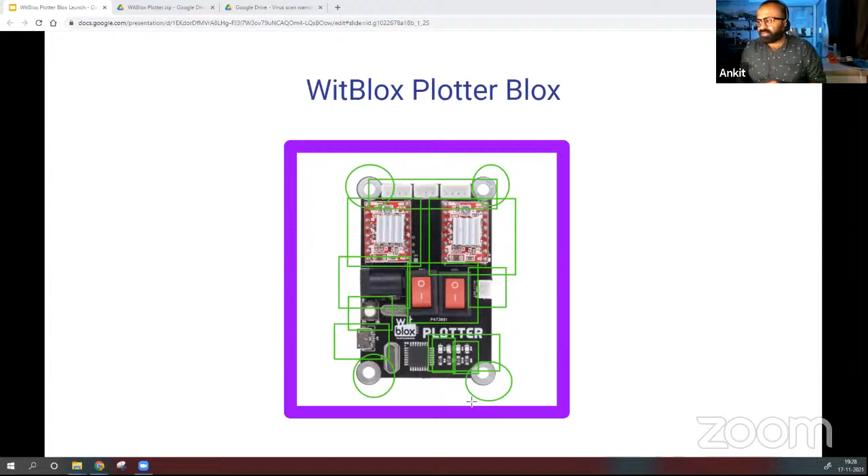What is the price of it? I'll come back to that—we have the price disclosed at the end of the entire explanation, so don't worry. And regarding how we have to buy it, there are sets like the solar box, the DIY mega kit—I'll let you know about that too. We'll come back to that.

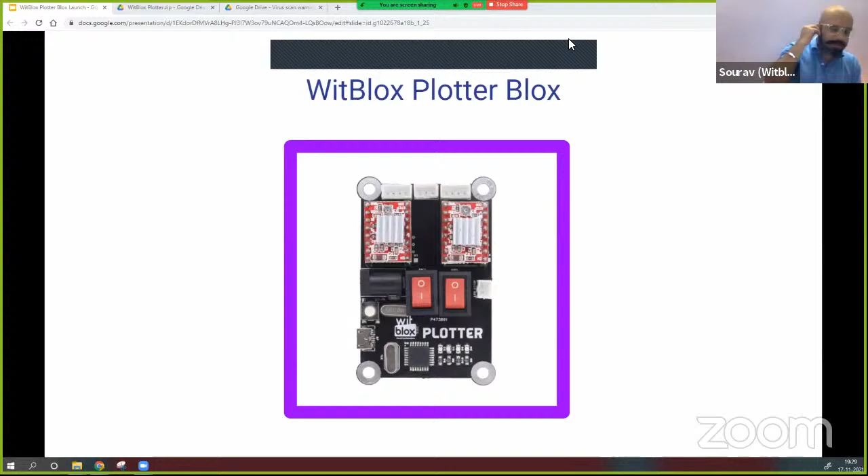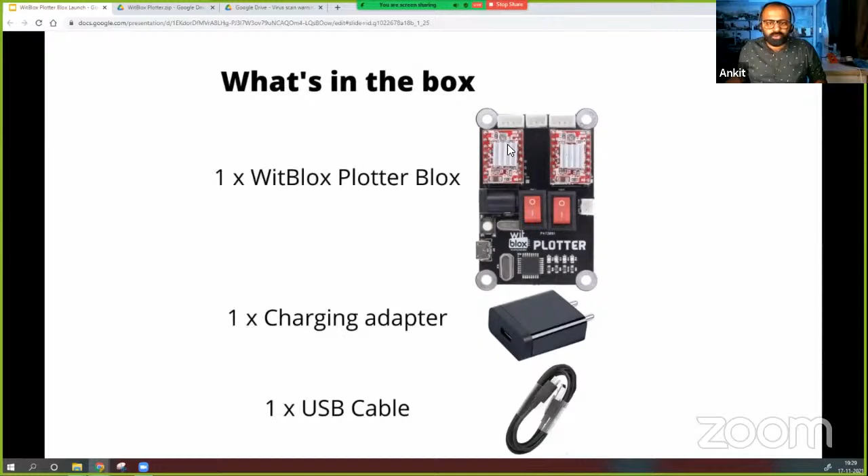How it works is simple. When you have a design, you just click a photo, put it in your PC, and use the software that we are going to provide. Using that software, you'll import the image and then hit play. When you hit play, the Plotter Blox will automatically take that drawing's outline, and that outline will be printed by the Plotter Blox.

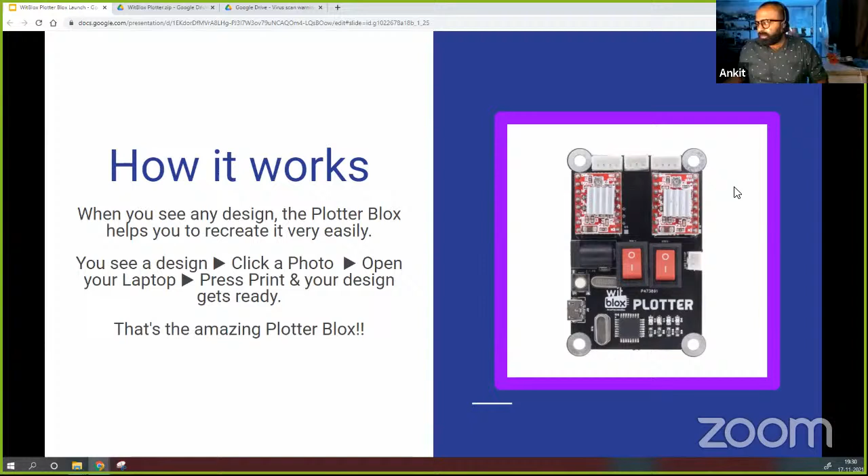Sir, that WitBlox app—will this project show how to do printing with Plotter Blox? Will that come, sir?

Yes, all the how-to part I'm going to show you right now, and we'll upload videos for configuration as well, because there are two parts to this Plotter Blox: one is the hardware arrangement, and second is the software configuration. Initially at the software level you'll have to do some settings, which we have already tried. That software is open source, but we are giving you a package of it so that in one click you can initialize everything required—you won't have to search for different software at different places. Everything will be in a single folder.

You'll install the software, and I will show you how to do the settings. After doing that, just input the image you want to plot, and the plotting process will start if you've done the hardware correctly. So we'll show you the hardware too.

So let's take a look at the video first.

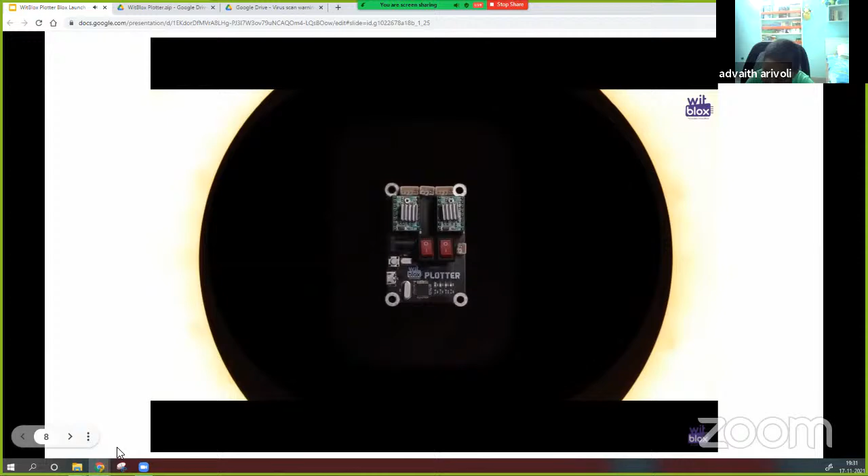Finally, we are ready. It took 2.5 years of research and development for us to come up with our very own Plotter Blox. I know you all were waiting for this moment eagerly, and now the team of WitBlox is so happy to present you the Plotter Blox.

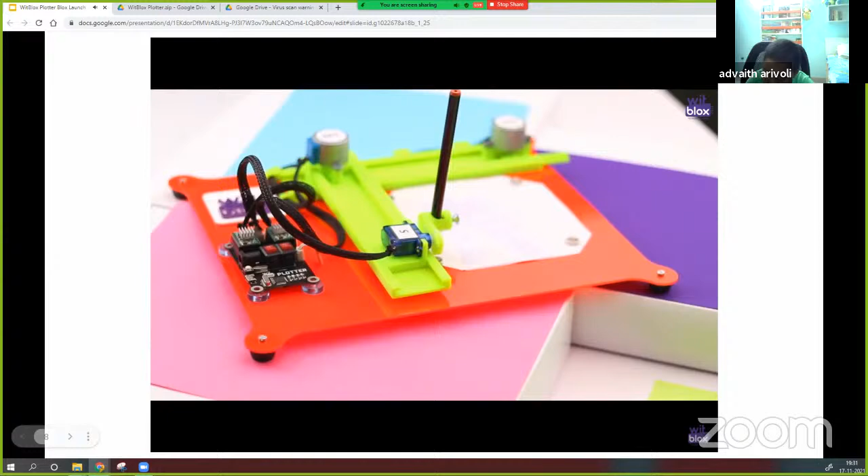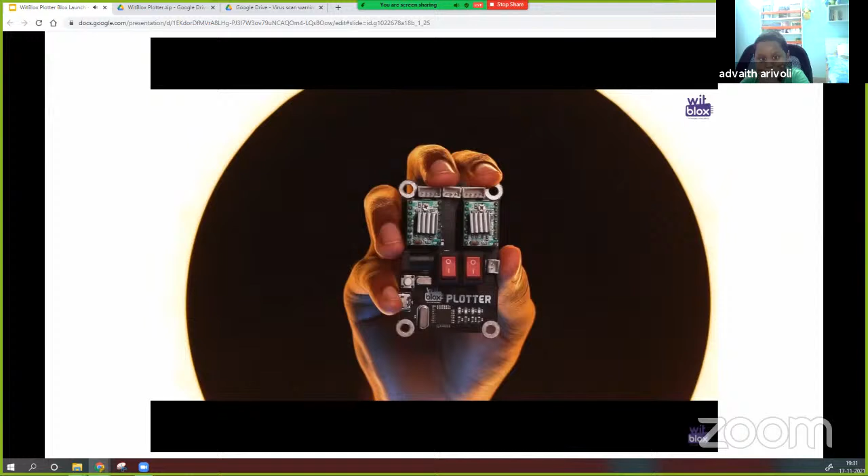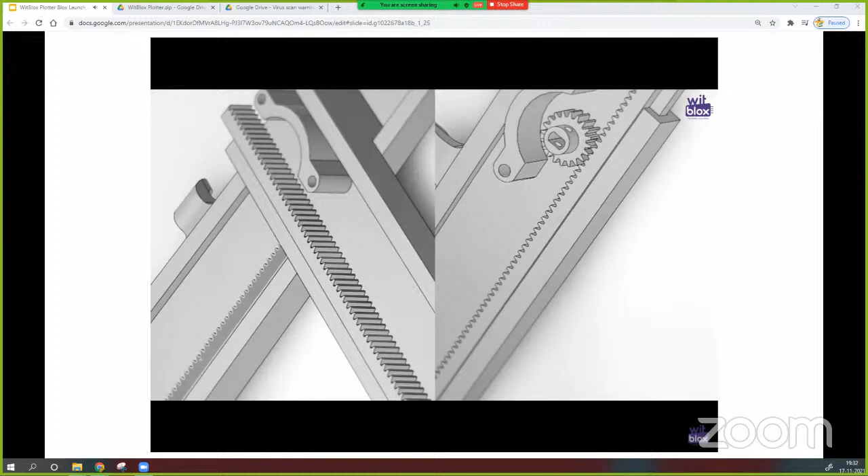Why did it take 2.5 years? Well, it's an obvious question. Let me use this opportunity to reflect back on how it all started. It started with an idea. We came up with a lot of prototypes, and we designed 7 to 8 types of Plotter Blox. It was a great learning opportunity. A lot of changes took place every few weeks, and every now and then a new difficulty popped up. This was happening because we were designing the product from scratch, but it was a great learning journey.

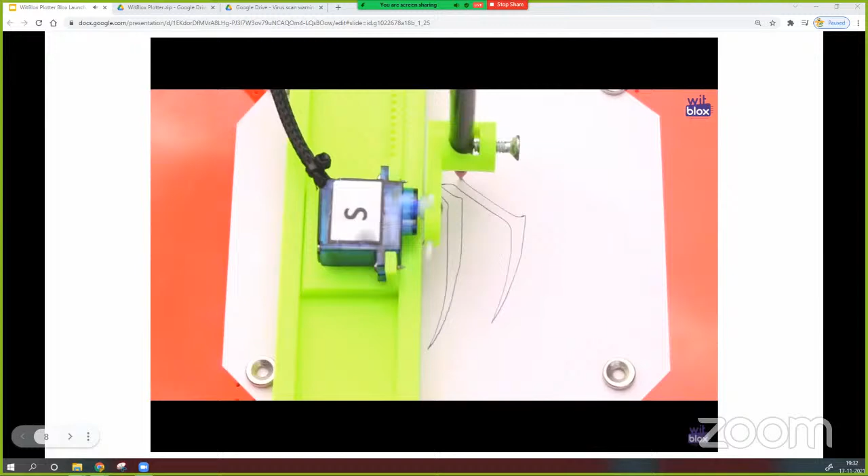So now, when you see a design, the Plotter Blox will help you recreate it very easily. You see a design, click a photo, open your laptop, and press print. That's the amazing Plotter Blox. Over to you guys.

So sir, we can control any motor, any servo, with the plotter block, right sir?

Okay, I'll let you know first how the software is, and then we'll come back to the hardware. Just hold on. Yes sir, I have a doubt. You hold on with your doubt, dear. We'll come to that part at the end of this event, we'll clear all your doubts. Don't worry. Yeah sir, okay sir, I have the doubt at hardware. Okay, just hold on, we'll come back. And I can see Tech Warrior has just taken a screenshot of my background. Nice to see that, Tech.

So let us come back to the software. What is this particular software? When you buy Plotter Blox, we are going to send you a QR code. All you need to do is use that QR code and scan it on your phone, or scan it from your laptop's webcam, or use the link at the bottom. It will send you to a drive link. I'll show you that drive link. Something like this would appear - it will give you the Witblox plotter.zip file. Is my screen visible to everyone? Yes sir, okay. So plotter.zip is the content that is going to come here.

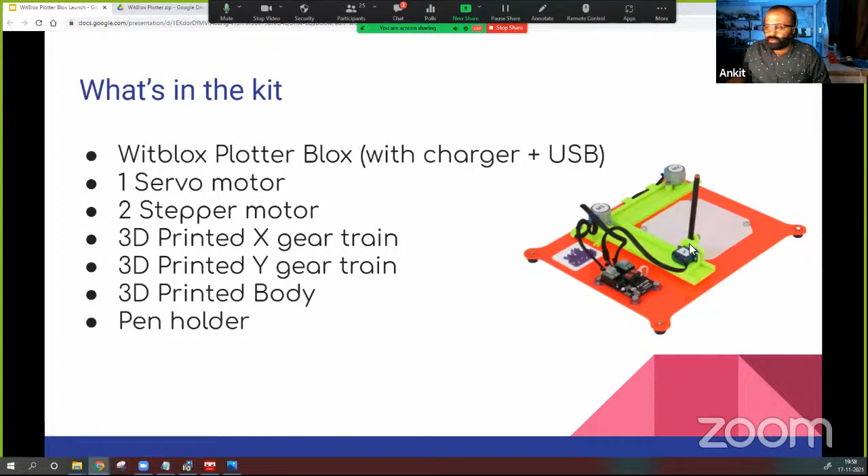Okay, actually, I'm really sorry, this is not a 3D printed body. That's a mistake over here. It's an acrylic body over here, with a pen holder. So this is what we are going to have in the kit.

Sir, what will be the price of the full kit with all the blocks? Let me just show you that. Sir, can I ask a question? Just a second, let me just show you some applications of what it can do.

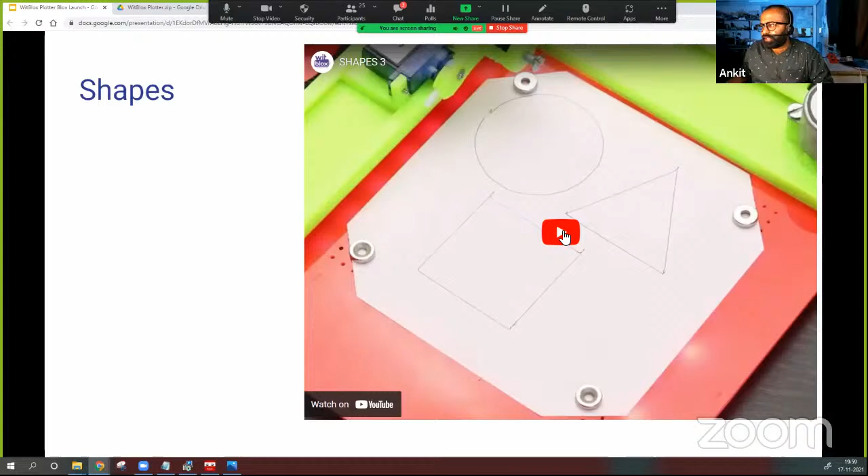Everyone is ready to complete their homework with the new Plotter Blox. But as we know, the Plotter Blox has endless possibilities, and one of them is drawing itself. So let's give our plotter some interesting shapes to draw. Let's begin.

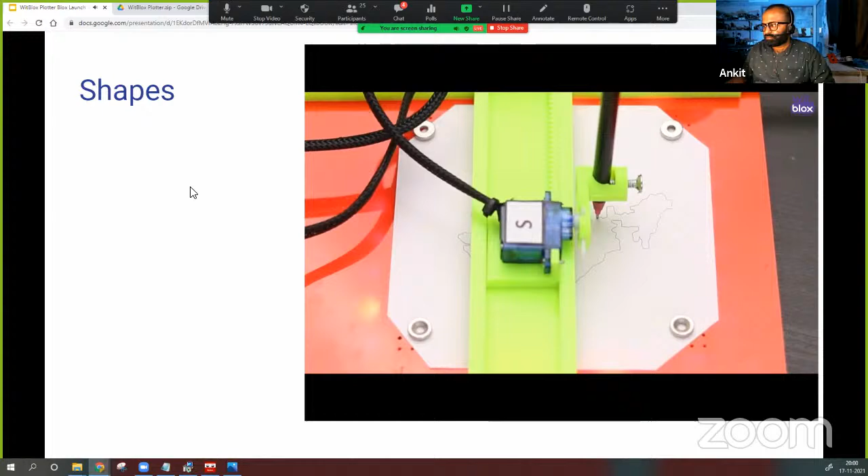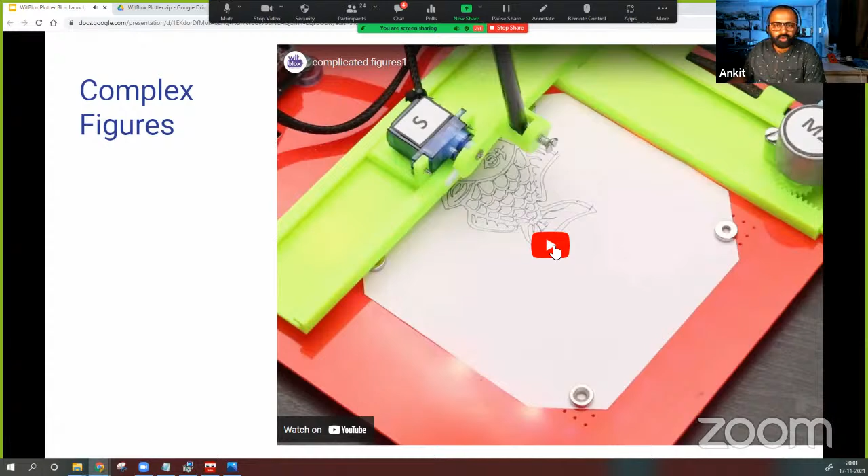Everyone is ready to complete. Let us look at some complex figures also. After making some simple shapes, I cannot stop at basic designs. Now let's give the plotter some difficult and complicated designs to draw. Let's begin.

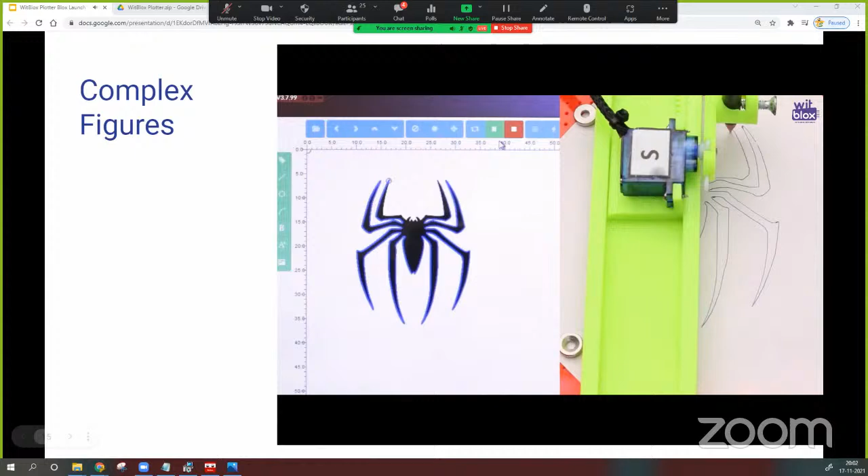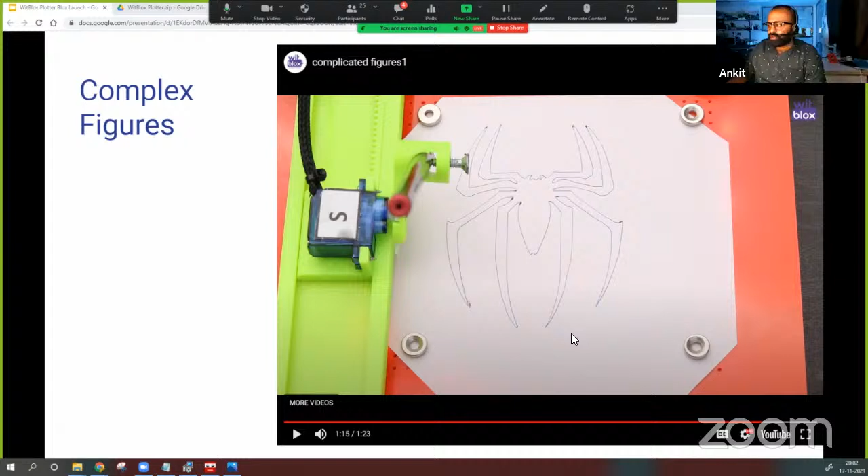Now you see the spider that we used as an image, if you look at the image, it was a filled image. But since we did the settings as an outline, it will always pick up the outline part, and it is going to draw the outline.

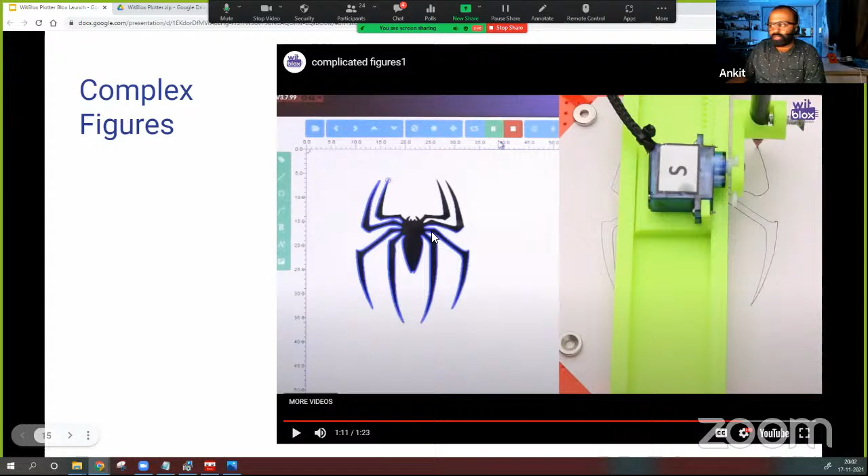Excited, right? After making some simple shapes, I cannot stop at basic. Let us look at some words also. After drawing some basic shapes and lines, we are very close to sketching out some text using our Plotter Blox. So now let's try out how the Plotter Blox writes.

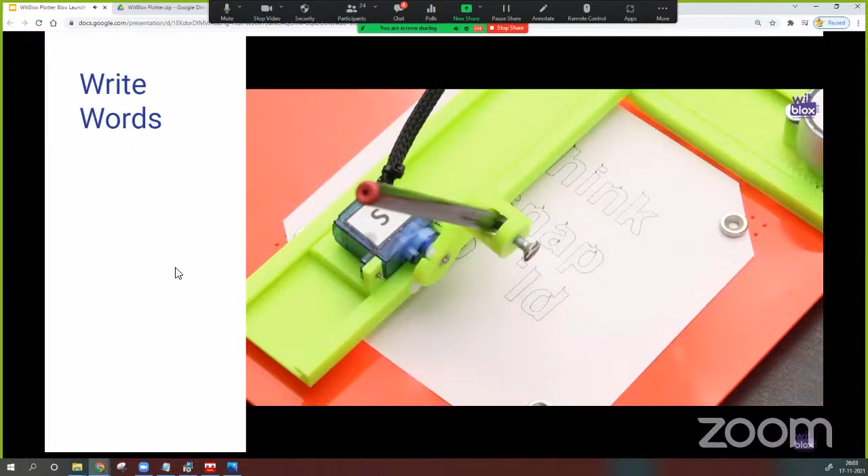Okay, now let's try some design that has both some shapes along with some text. Any idea where we can find such design? Yes, we can make our Witblox logo using the Plotter Blox. Let's start.

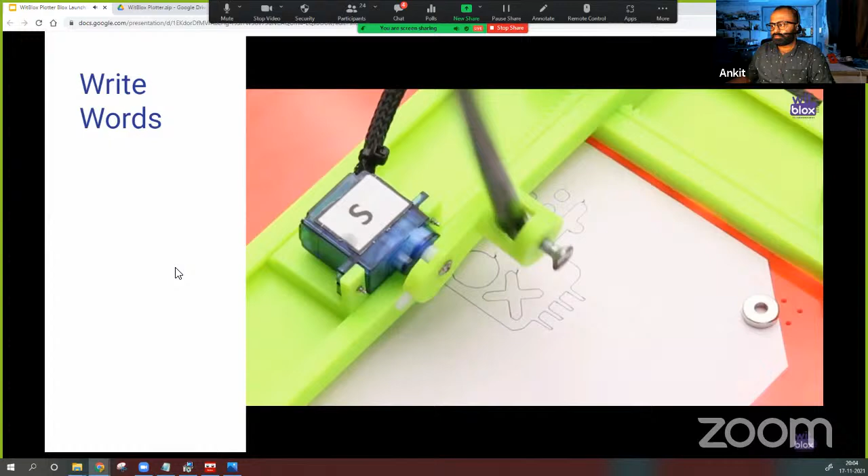So here are some of the applications that we did. Let's move on. After drawing some, so how to get them?

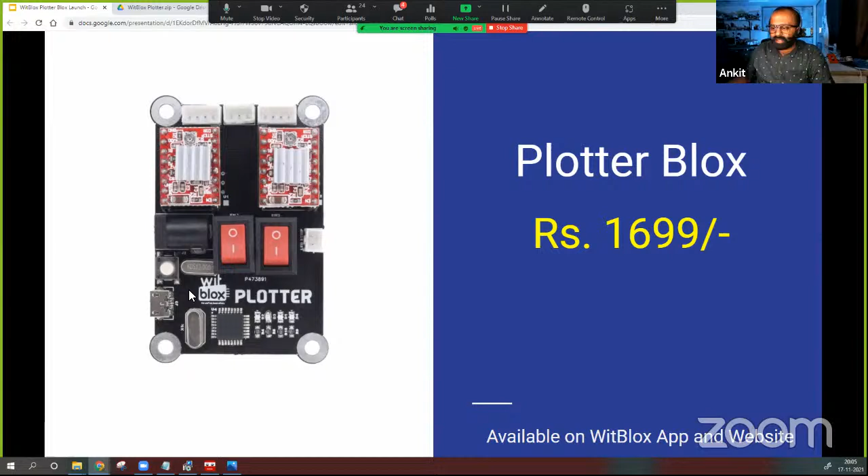So the Plotter Blox hardware is a bit expensive, but the thing is, the blocks itself can be used to build your own plotters if you're making them. So it's not just one hardware, it's multiple hardwares using just one set of blocks.

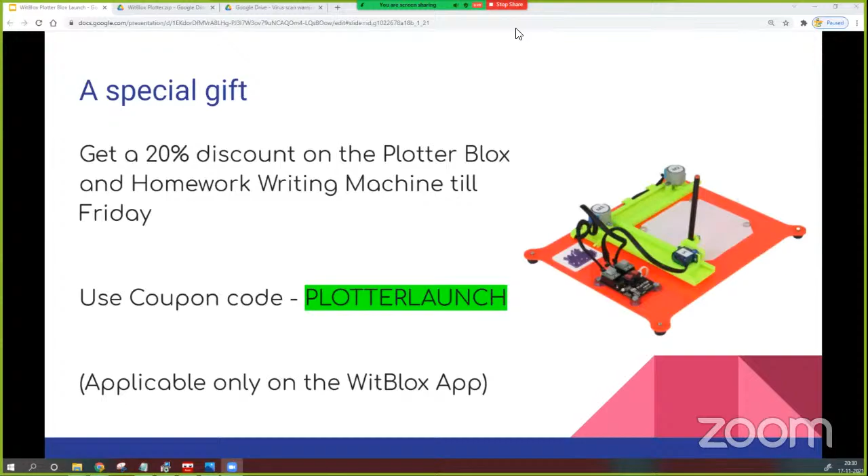Thank you, Ankit, for joining today. Thank you everyone. Thank you, sir. Thank you, sir.